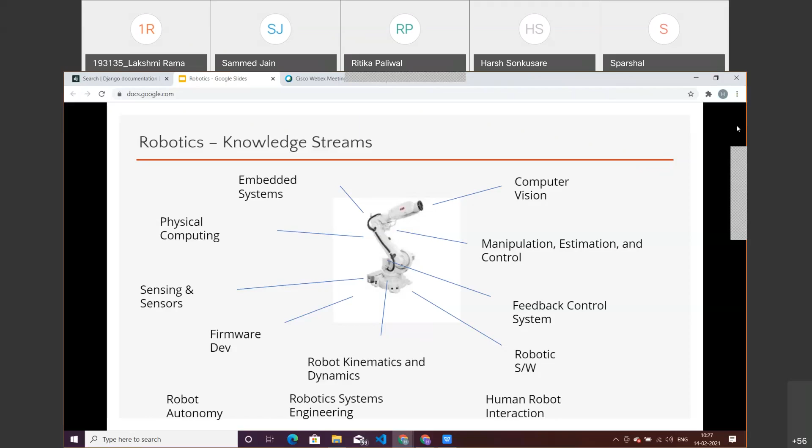So when we look at the robot's design, there are a lot of different things. There are algorithms, there's vision, there's hardware. This is the design part of a particular robot, which is there physically - you can touch it, you can feel it. That is the hardware design.

And then there's the software design, which is the algorithms, the models on which it works, the motion planning, the way it moves, the codes that are written, on which the robot runs. That is the design. And then there's the implementation, which basically includes how the robot works on the design upon which it is built.

So there's a lot of embedded systems, and some more programming into it. The programming you're doing now, I hope you must be writing some codes - that is basically you're doing problem solving, right? You have some problems, you have to write a code which solves that problem.

So robotics is another problem. There are a lot of questions and issues that you have to solve. So for that you write codes in different languages. There are some particular languages on which you write these algorithms and codes, and the robot runs on them.

And then there's installation. There's a lot of testing and a lot of using before it is already into the market or into the workspace. And a lot of research is done into a robot to check if it meets the needs of the robot's user. Next slide.

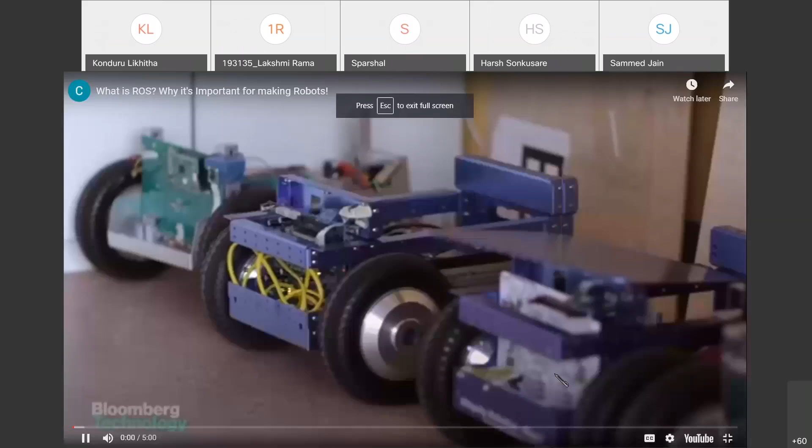I guess you people could hear it, right? Yes.

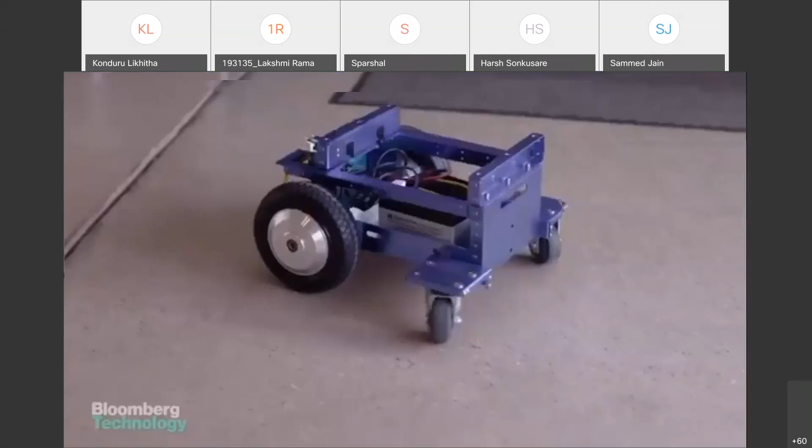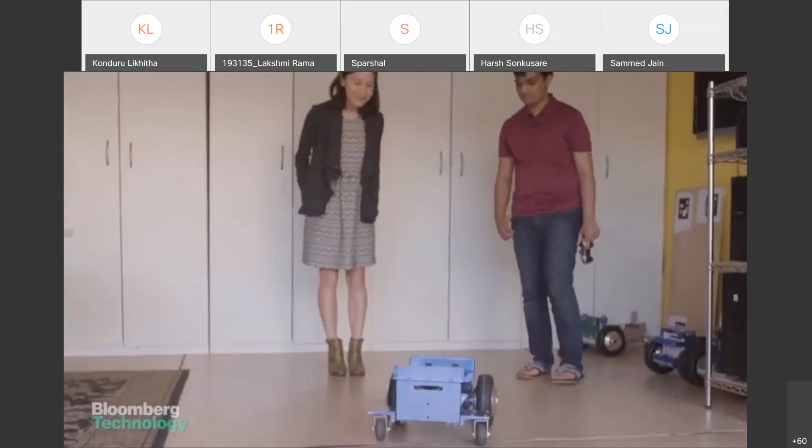I really started getting interested in robots when I realized that I could write some code on my computer and something would really come alive. This robot is called Ernie. It makes a map of the garage just by driving around, and then based on the map, it can figure out where it is. Ernie's creator is Rohan Agrawal, a high school student who's been building robots since he was 9. ROS has really helped me personally because it's allowed me to make robots that I otherwise could not have. The ROS that Rohan is talking about isn't a person - it's the robot operating system, and it's the underlying code that makes Ernie work. But ROS doesn't just run Ernie, it runs robots everywhere.

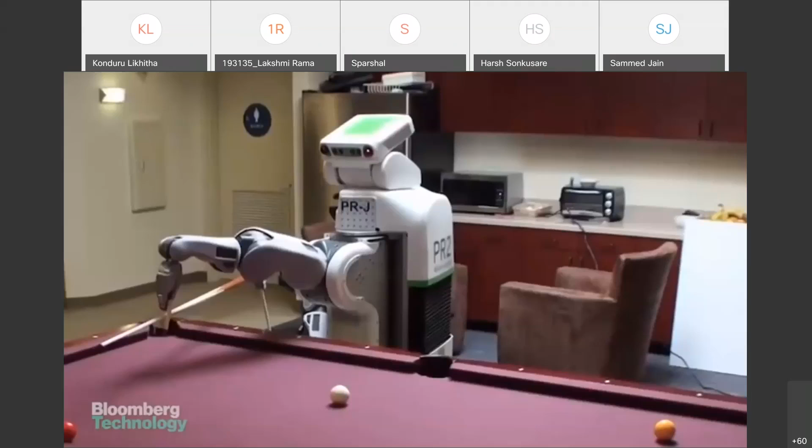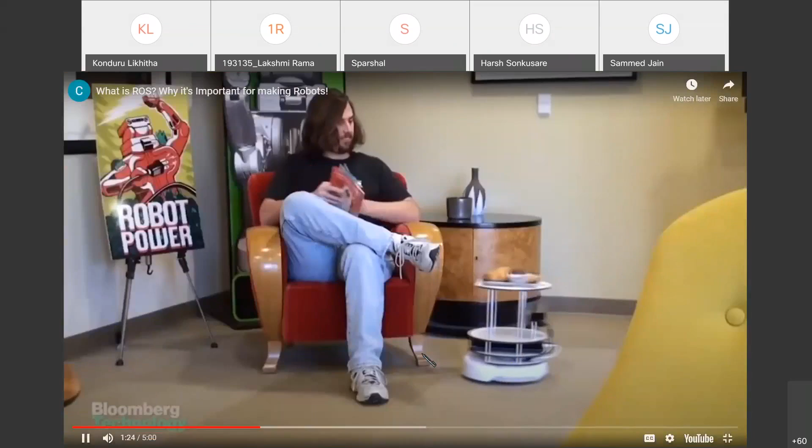The robot operating system came to life in 2007 at Stanford University and then moved to Silicon Valley incubator Willow Garage. That's where some of the smartest and wildest robotics thinkers, including Leila Takayama, had the freedom to pursue their ideas, no matter how crazy. And it did get a little weird.

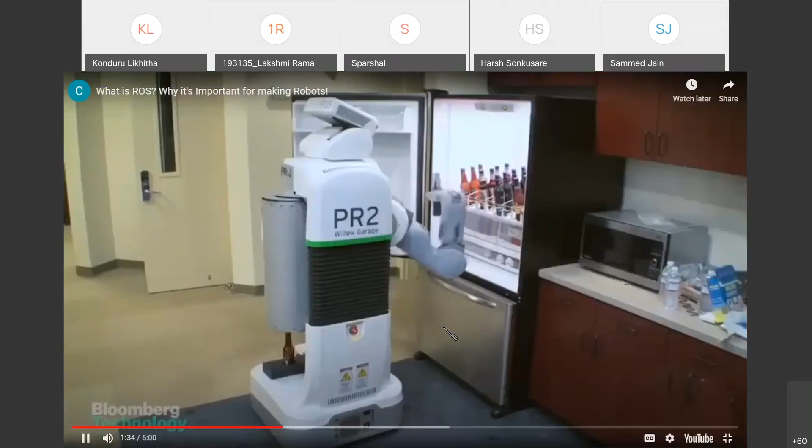One of their biggest projects was the Personal Robot 2, or PR2. PR2 was a big, honking robot. It was a 32-degree of freedom, $400,000 mobile manipulation platform, which was like, whatever. It was a very expensive robot that ran around and grabbed stuff.

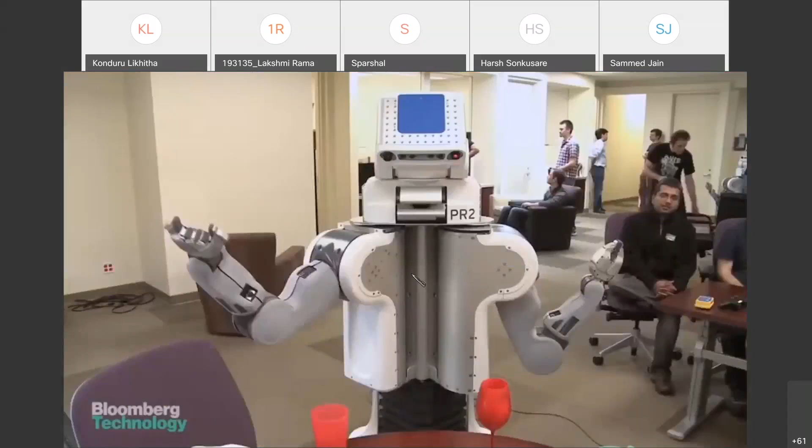PR2 was fun, and more importantly, it proved that the ROS code that ran it actually worked, but it wasn't all smooth sailing. When ROS first got put on PR2, it was rough. And when things broke, it was kind of hard to fix.

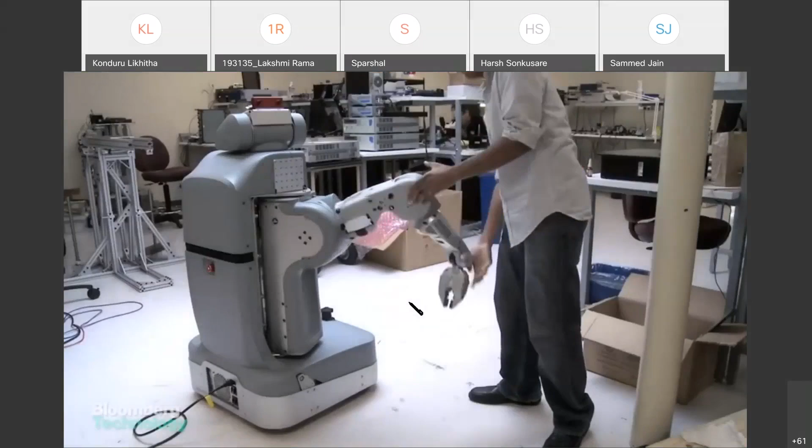Leila realized that ROS could be something bigger. Just like how Microsoft Windows made computers easy to use, ROS could open robotics to everyone. If only it weren't so fiendishly complicated.

One thing that I started talking with the team about was, we need other people to be able to use the code too. Otherwise, people aren't going to want to play if you make it too hard to use. So we ended up breaking down the code into usable bits and making sure that people who don't sit next to us could still use the code too.

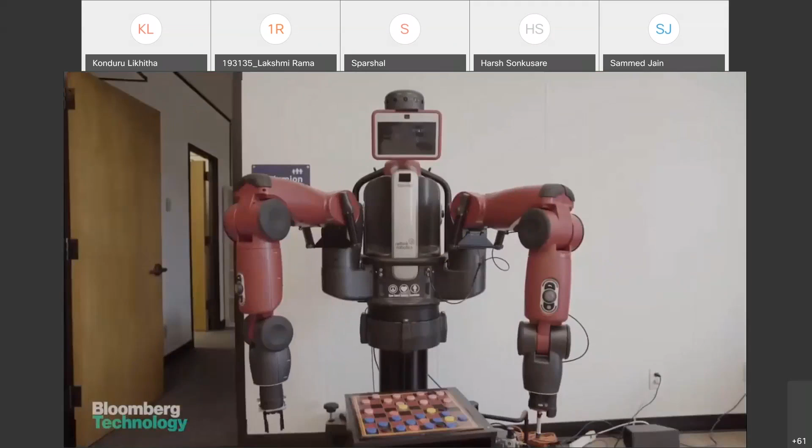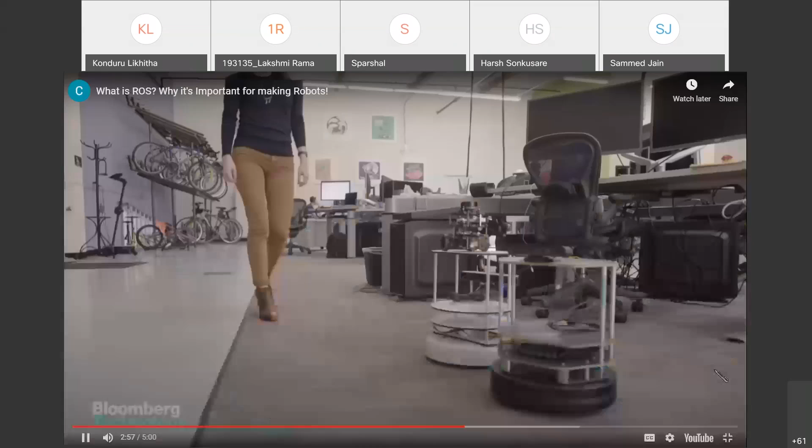Leila and the Willow Garage team tweaked and tinkered with ROS and eventually handed it over to a startup, Open Robotics, which used to be a nonprofit but now takes on commercial work. The company doesn't build robots. It develops the ROS software and hardware kits that people all over the world use to make their own.

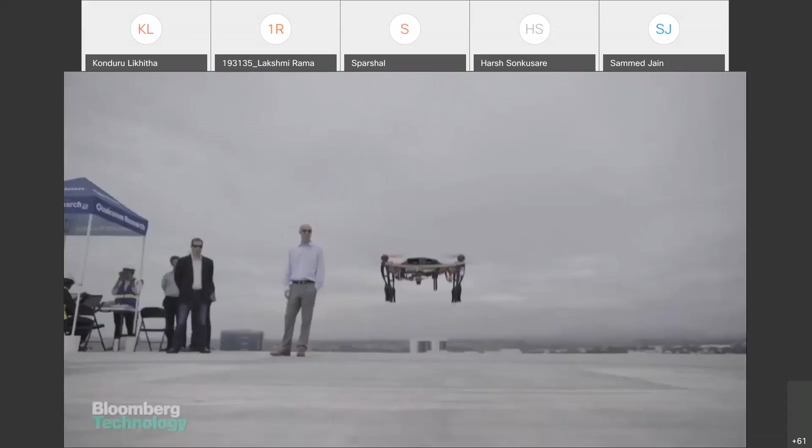ROS code is packaged into different applications and uploaded to the web where anyone can download it for free. And everyone does. From giant companies like Intel and Qualcomm to military contractors and small startups.

Mirza Shah is the co-founder. By this time, you might be clear with this point that just like Microsoft Windows made computers easy to use, this ROS made robotics open to everyone.

So anyone with a basic knowledge could start making a bot. So if you get any problem in your PC, you won't go and code deeply, and you need not debug it, right? You could just update it, or you could just take up some actions which your PC suggests. So this is a flexibility an operating system could provide. Even in ROS, if there is any problem, you need not go into the things deeply and work it out. That flexibility ROS can provide.

And this code is also packaged into different packages, different applications, and it's uploaded into the web. So for example, if one person codes for a robot to be able to see, and another person wrote code for arm manipulation, then the second person could download the first person's code and include vision features in his arm manipulation bot.

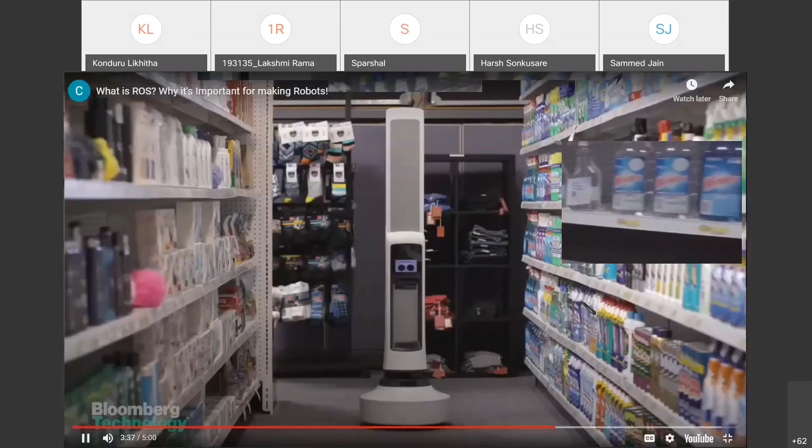Of Simbe Robotics, the startup behind Tally. So the various tools that we use to build Tally, for example, the sensor drivers, the navigational algorithms, and the 3D cameras, those all come from ROS.

This oddball hangs out in the aisles at retail stores and can tell which products are in the wrong place, which have the wrong price tag, and what needs restocking.

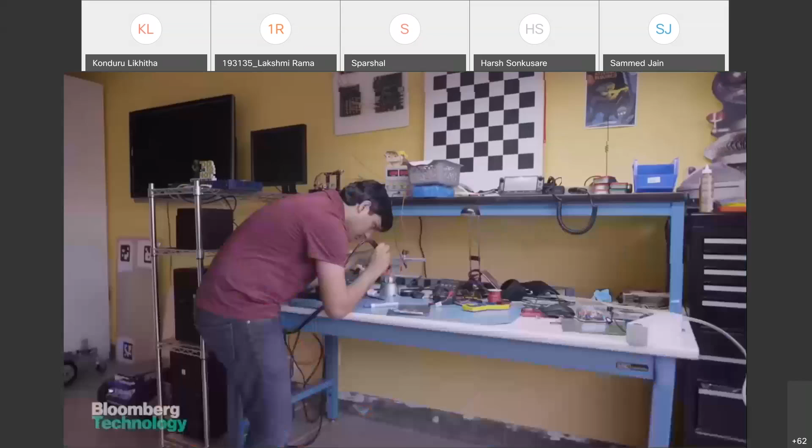And that's what makes Open Robotics different from most other Silicon Valley companies. It relies on a community to make it better. The kids tinkering in the garage, new robotics companies, and tech giants who use ROS share their adapted code with other users.

Just like with anything that you put out in the world, more of the feedback is, hey, this didn't work, or hey, how do I use this thing? But it's just a different experience to be able to put it out there constantly as you're building it. ROS has a learning curve. You're really getting into the code and trying to figure out where the problems are, but it's always kind of exciting when it finally works.

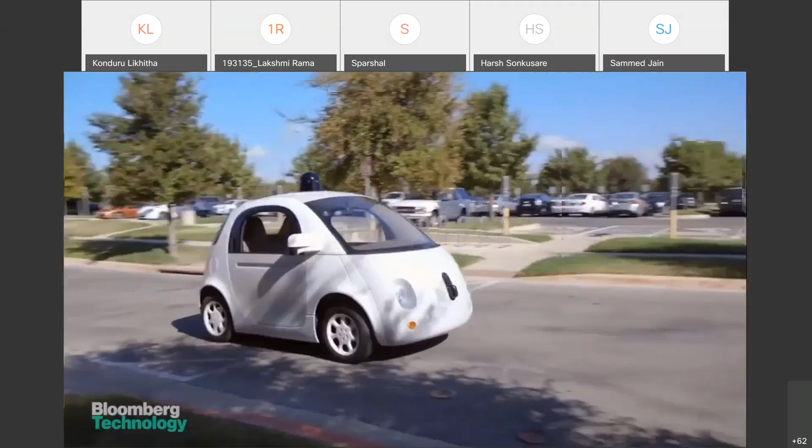Ernie is just a fun hobby for Rohan now, but someday the ROS code he used might end up in a driverless car or an autonomous lawnmower, or maybe something we haven't even imagined yet.

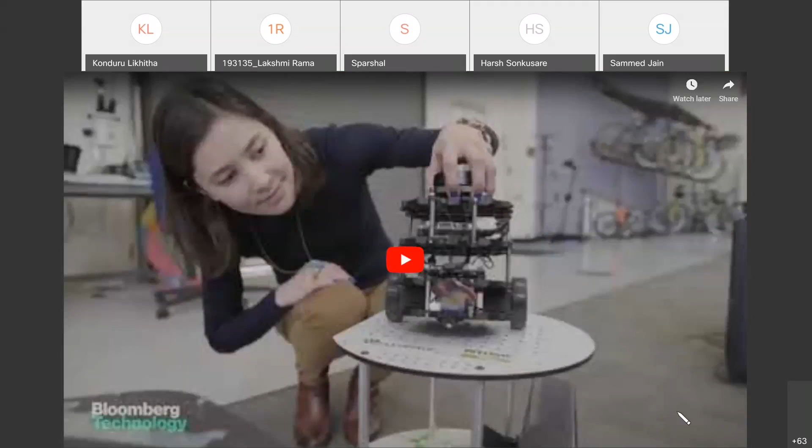So we'll move into some topics of ROS briefly. As this is just an introductory session, we won't go into much detail—we'll cover ROS in depth in the next part of the series. But to give you a basic idea, the software in ROS is organized into packages.

The goal of these packages is to make it easy for everyone to use. A package might contain ROS nodes—which we'll discuss shortly—a data set, third-party software, or anything else that logically constitutes a useful module.

A node is just a piece of code used to communicate with other ROS nodes. For example, in a wall-following robot, one node could get the distance sensor value, and another node could control the motors, with the two communicating to control the robot.

You could write an entire ROS application in a single node, but having multiple nodes ensures that if one crashes, it won't crash your whole application. It's easier to debug that way—you can check each piece of code individually, whereas debugging one giant node is very difficult.

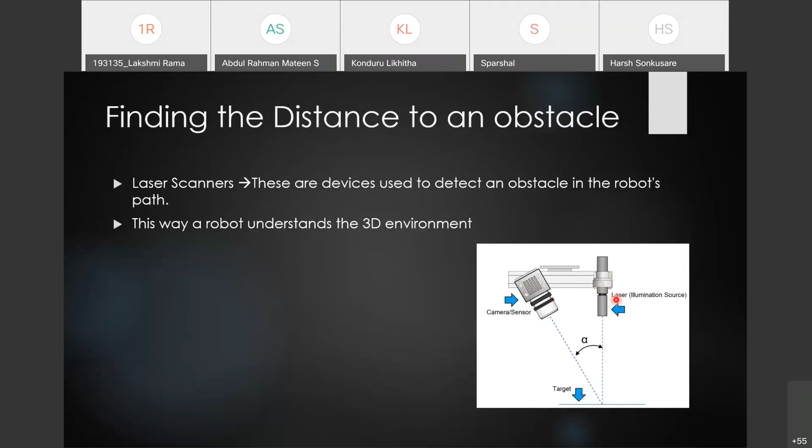How this laser scanner works is a laser beam is sent out, reflected across any surface—it could be any obstacle in the robot's path—and then the reflected ray is captured by a sensor. Using the time since the laser was sent out and received, we're able to calculate the distance from the robot to the obstacle.

So here are a few parameters we need to consider while selecting a laser scanner. There are 7 parameters. The minimum angle is the rightmost angle the laser scanner can scan, and the maximum angle is the leftmost.

Then we have angle resolution. If you look at the image here, the robot is sending out multiple beams. Angle resolution is the difference of the angle between any two beams. So the higher the resolution, the less angle difference there is between any two beams, so it could be useful for you.

And then the time increment and scan time - these are two different parameters. Time increment is, suppose the laser scanner sends out one beam, the time increment is the time required for the robot to send out the next beam after it. But scan time is when the laser beam is sent out all the way from here till the end, and then once again. So scan time would mean 2 images.

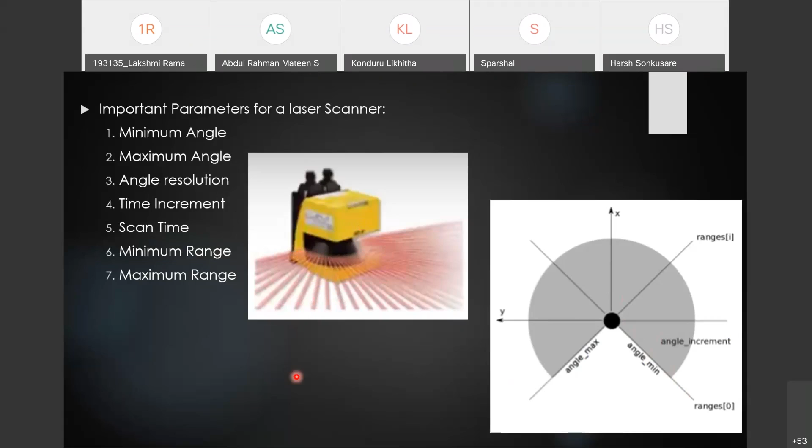So maximum range and minimum range is the distance the robot can measure. So when all these parameters are running, the laser scanner gives out two inputs, both in the form of arrays. It's the list of intensities of the laser beam return, and using that we calculate the distance till the obstacle.

So now, so far we have looked at how to understand the distance moved and the distance to an obstacle. But now we need to understand the velocity of the robot. So the velocity is measured using a robot sensor.

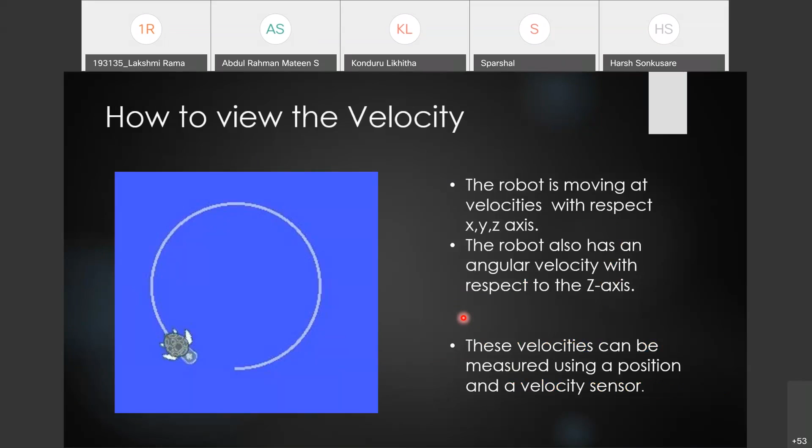So here we have a robot moving in circles. You run this command in the command prompt, and this is what you'll be looking at as the result. The linear velocity represents the distance moved according to every axis, while the angular indicates the rotation.

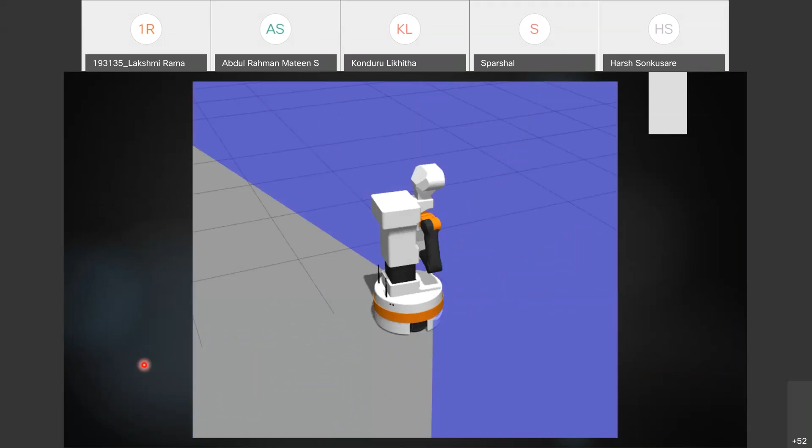So I think I'm done here. Do you have any questions?

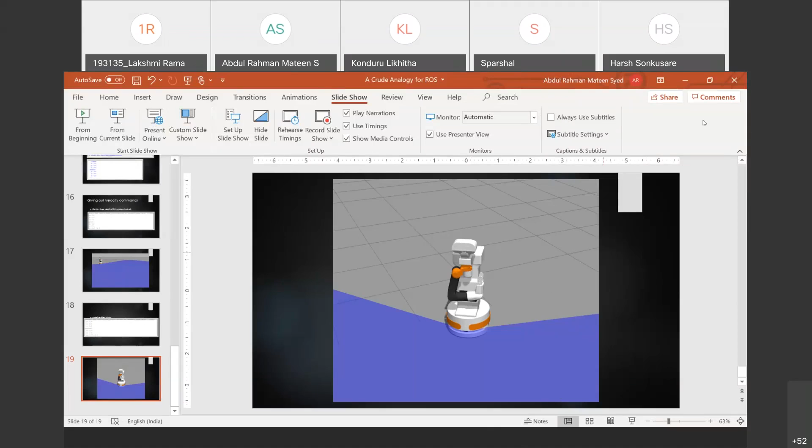Yeah, 0.3 radians basically. That's like a value which you have mentioned as a question.

Okay, so now we'll be looking upon manipulators and end effectors. So manipulators and end effectors are basically mechanical components of a robotic system. Like all as you got in introduction, there are many different streams in robotics. So mechanical engineering is a powerful and a requirement stream to build up a robot.

So a manipulator is basically a mechanism which is controlled through some electronic control systems, and it consists of various segments called links. This mechanism will interact with the environment to perform the specific task which is given to it. So it is nothing but a mechanism consisting of various links, and it will perform and complete its task. That is what a manipulator is.

As you can see in the image here, we have some robotic arms. Like you must have seen various videos, these manipulators are used in factories to automate things.

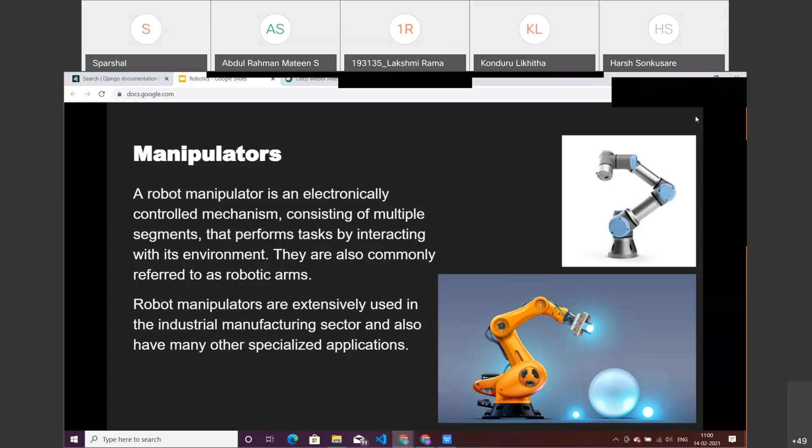So here you can see two images, and they have specific applications which are specialized in their own region. Okay, we'll move forward to the end effectors now.

End effectors are basically the last link of a manipulator, so that is where the robotic system will interact with the environment. That is the touch point, you can say. End effectors can be of various types.

It can be hand based, as you can see in the image. It depends on the application. If you want to pick up something, you can use vacuum suction pumps, so that can be an end effector.

If you want a specific thing to be picked up, we have a hand type of end effector. Its strict definition is basically the last link of a manipulator, where the robotic system interacts with the environment and performs its task.

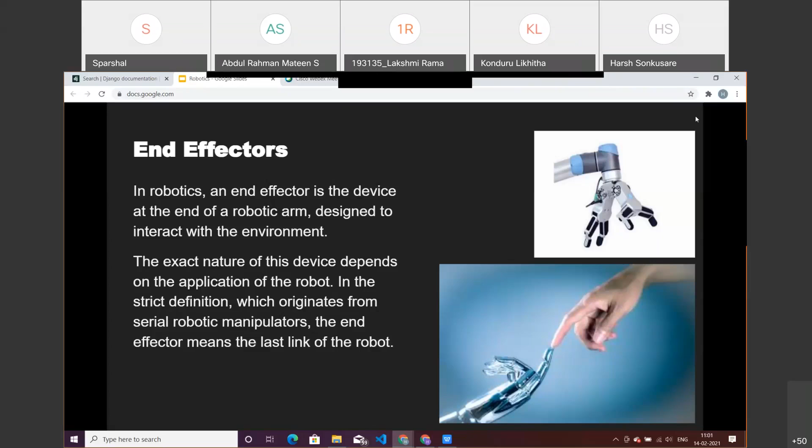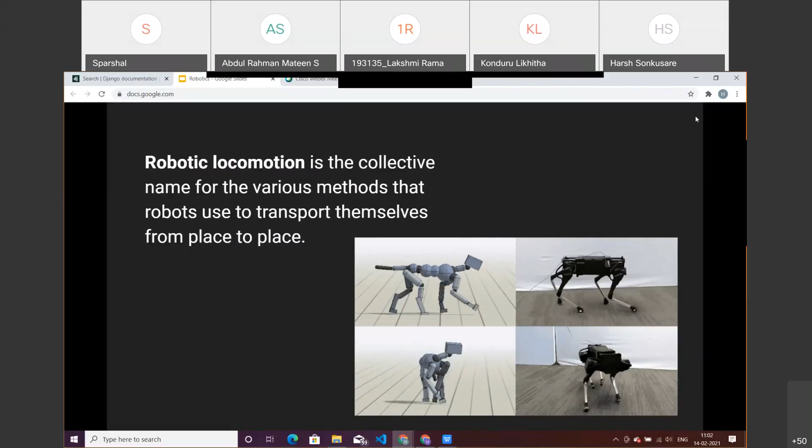Okay, we'll move forward. Now we'll talk about robotic locomotion. Locomotion is nothing but traveling from one place to another. Without this, your robot can't move, right? Your robot requires something to move. So robotic locomotion is a collective name for various methods through which the robot can transport from one place to another. There are various types of robotic locomotion.

We'll discuss a few in brief. One is legged locomotion. This is a bit difficult because just imagine your own feet - there are so many joints, a knee joint, joints at your ankles, and all these need to be connected through motors. So it's a complex type of locomotion, but it has been implemented very well by Boston Dynamics. You can look that up and check out their videos. They have made humanoid robots with leg kind of locomotion.

Next we have a common locomotion, the wheeled locomotion. It's pretty easy to implement because there won't be a large number of motors. You just need to power up a motor and run the wheels.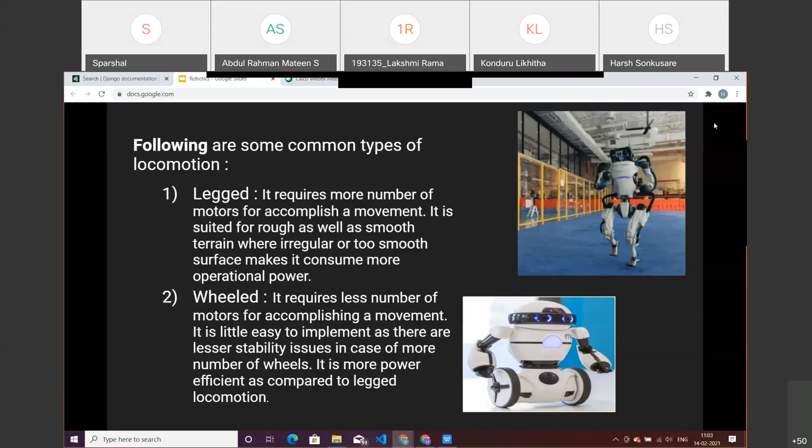Okay, can we move forward? We also have this slip and skid mechanism. If you know army tanks, what they have is basically chains around the wheels. Using the chains, how they move is by slipping through the chains. That is one kind of locomotion used popularly. If you know the Mars rover, it has the skid type of locomotion.

Then we have flight locomotion, which is like moving around in space by flying, or jumping. These are some modern types of locomotion based upon biological systems like frogs. So what robotic engineers do is study these, and then figure out what type of mechanism has to be built, and work upon it.

At this point, I have one question for the crowd. Are drones robots? What is your thought about this? Like, are drones robots? What do you guys think? Anyone volunteering to answer?

Yes, they are robots. Okay, who was this? Hello? Yeah, hello. Can you explain why do you think drones are robots? Because they have mechanical moving parts, and these mechanical movements are controlled by system software. They're having some electronic feedback control. So all the elements mentioned in the robotics definition are present in drones.

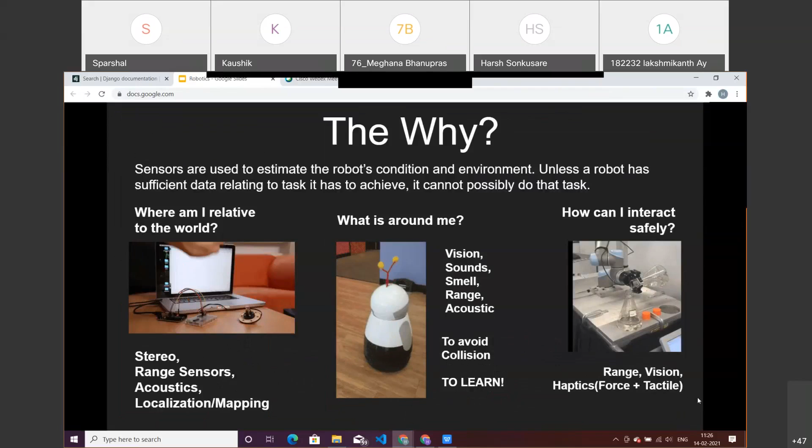So, feature detection. You've also seen face recognition examples nowadays in many security systems and so on. We show our face and it recognizes who we are, what our identity is, and something like that. So this feature recognition is something that plays a role here.

So when our face is scanned by the robot, after the scanning is done, it will first divide our face into a basic view, the shape of the face, and then it will classify each of the features - the shape of the eyes, the distance between the eyes, and everything like that. So this is the feature recognition part of it.

As an example, suppose there's a plus symbol in green color. After that part is sensed by the robot, it is able to draw only the outline of the plus. So you can see this feature recognition is a part where the robot understands each and every part clearly, and then it processes the input data in a much clearer manner for it to perform the task.

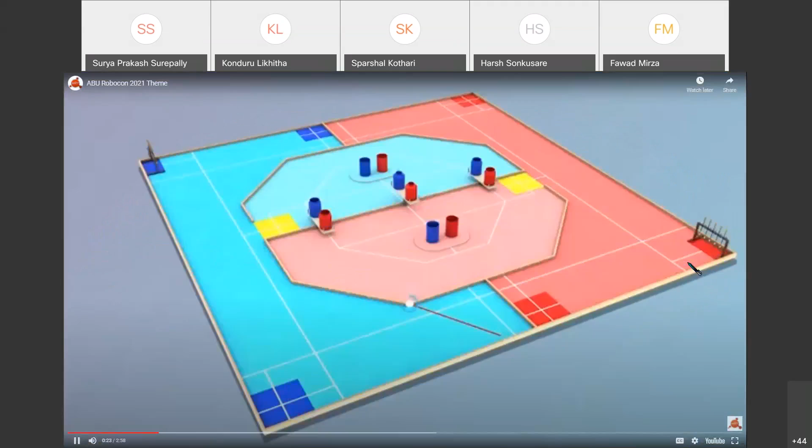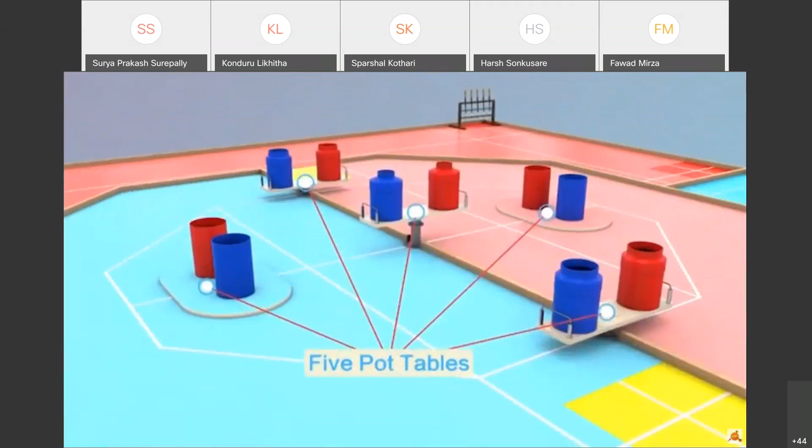So here is the region where our bot should only play. Every team has 20 arrows - the robot can take the arrows and throw them one by one into the pot. We have 3 minutes for the game. The robot that completes throwing 2 arrows into all the pots will win. If no robot can throw into the 2 pots, they will consider the maximum points. The defensive robot can enter the inside region of the area to disturb the other bot's throwing. The TR cannot enter it - it should stay only outside, and only TR can throw arrows into the pot.

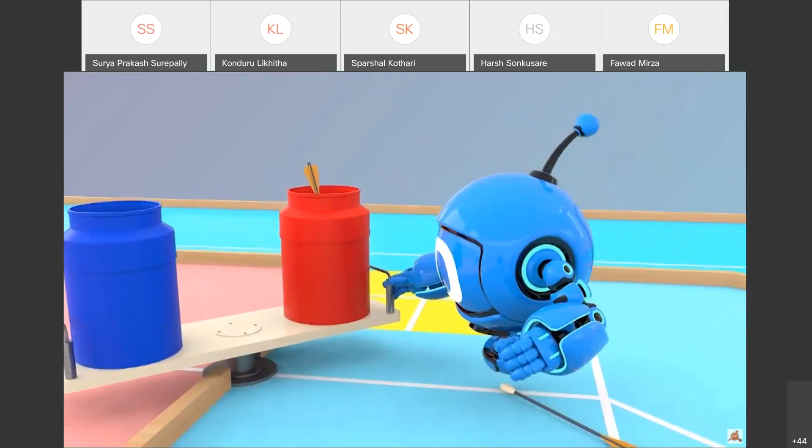After the arrows on the TR is completed, it can take 1 arrow or it can take all the arrows at a time. If all the arrows are exhausted, the defensive robot can help throw outside the arrows so that the TR can take it and reuse them again. The defensive robot can disturb other arrows also.

So the team completing this will be having 3 minutes. This is just the animation, it need not be exactly this, it's just an animation to show the rules and everything.

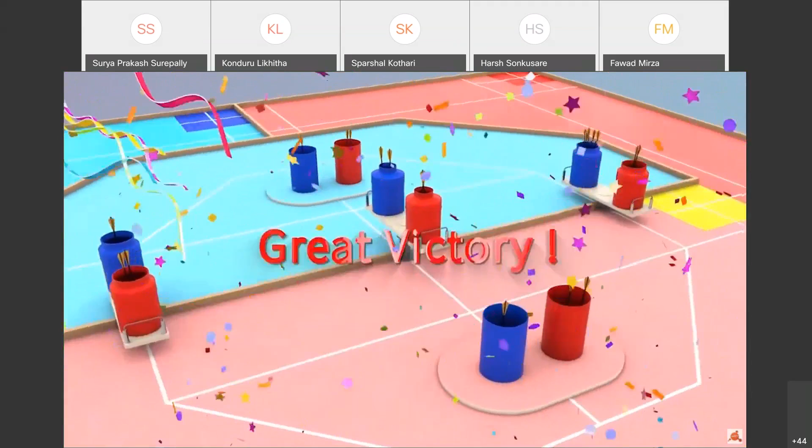This video is for that, but practically making these type of robots is not possible now, maybe in future they are possible. So generally we have to analyze the strategy and make the robots - it should be having a manipulator and image processing. So the things we discussed, locating the pot and everything should be done by ourselves only. So this is the challenge - I should say this is really tough.

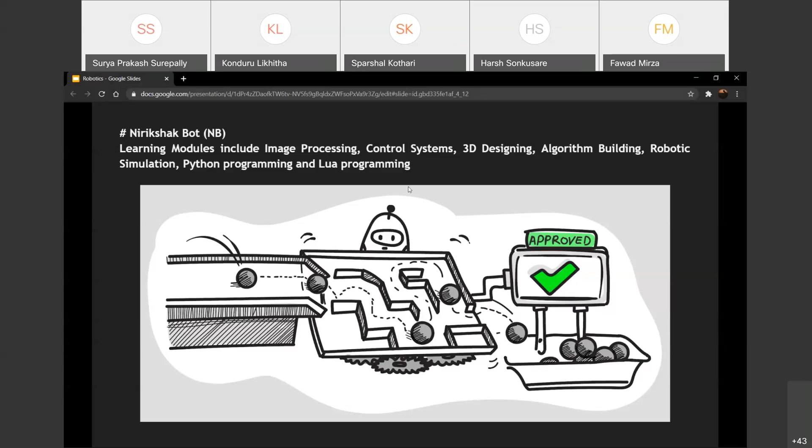So yeah, next we have Sahayak bot. This time two teams from our college participated. One, the team in which I was there, got this Sahayak bot. So basically we have ROS, 2D mapping, 3D mapping, and autonomous navigation, like the previous slides shown.

We were novices to ROS, so we got this thing. So yeah, this is the Sahayak bot, and next one is Vargi bot. Here we include robotic manipulation, robotic perception, IoT, Google app scripting, Python and JavaScript. This robot is related to that.

And finally, we have Vitarana drone - so this is the one the other team got. This includes control systems, path planning, image processing, and this is a drone, more cool stuff types. We have to simulate this thing in Gazebo, which is like an online simulator for the robot you are going to make.

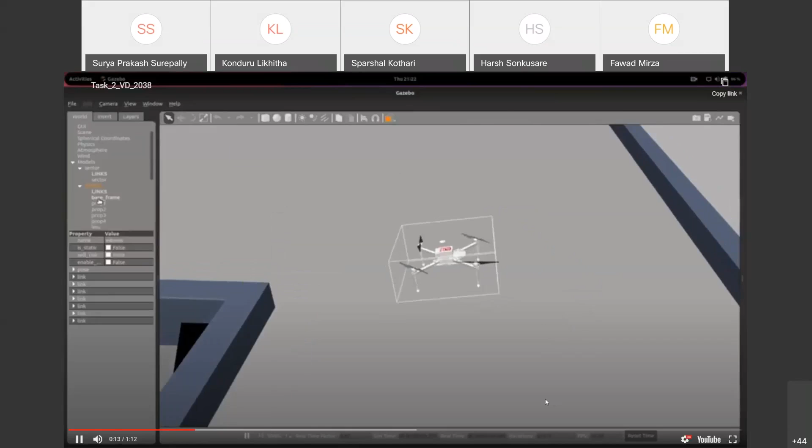So this was the thing - it has to pick things like address, drone delivery speed, so this is basically drone delivery. So here is the task from the Vitarana drone team, this was developed by the team from our college only. You see the control systems and stuff related to this.

There is no audio for this, okay so not an issue. So it has to pick the courier or something, it will take to...